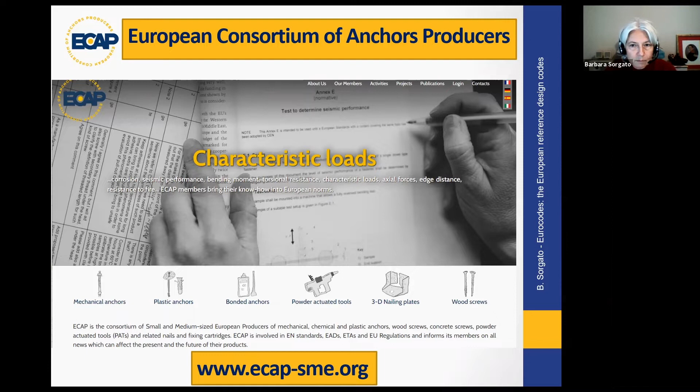ECAP is basically involved in everything around standardization, norms, European assessment documents, ETAs, and European regulations. And ECAP informs its members on all news which can affect the present and the future of their products. ECAP is independent and is self-financed through its members that are all small and middle-sized enterprises. We bring their know-how to CEN and EOTA working group tables. That means we are active in standardization.

And we also bring their know-how and inform them about the European regulatory framework on construction products, because that's needed when one deals with standardization of products. One needs to know the legal framework. ECAP is a community of manufacturers, namely ECAP belongs to its members and the members decide entirely about ECAP policies, and they work with team spirit.

That's important because they do not stick to national positions, because they know that Europe needs an open market and a shared market, so their approach is a European approach. All their efforts are in order to get European standardization and not national solutions.

Okay, the products. We deal with structural fixings. That's important because we will face Eurocodes from the point of view of these products, because that's the experience that we have. Structural fixings is a broad world, and we have bonded fasteners, bonded anchors, injection anchors. They have different names, but basically chemical anchors used in

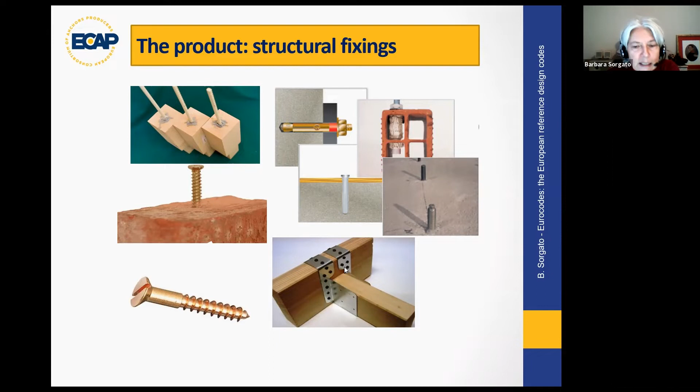concrete or in bricks. Then there are mechanical anchors, plastic anchors, and bonded anchors are also used in wood, also in timber. Then there are concrete screws also used in full bricks, and wood connectors, structural wood connectors, wood screws. They can be short as this one, but very long as well. And stuff like this that is called three-dimensional nailing plates. So these are the products we deal with.

Our products and generally construction products are covered by product technical specifications. I use the name technical specifications because it includes both standards, CEN standards, and EOTA assessment documents. The CEN standards, you probably know them with their national name. In Italy, they're UNI standards, in Germany, DIN, in France, AFNOR, then we have the Spanish UNE, and so on, for every member state. And they include also European assessment documents and related ETAs. So these are the product technical specifications.

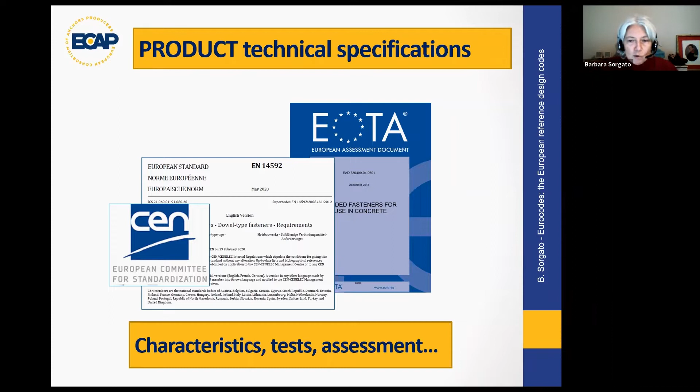These specifications deal with characteristics, tests, assessment of the product. So their approach is a product approach. And we are dealing with the CE marking, which is the framework given in the regulatory framework of the CPR, Construction Products Regulation. We will come later to more detail on the CPR. So we are talking about the CE marking, and the approach is the market, the European market.

But we are dealing with Eurocodes. Eurocodes is all about design. So it is not about the product, how to test it, how to assess it, which characteristics, but rather how to use it.

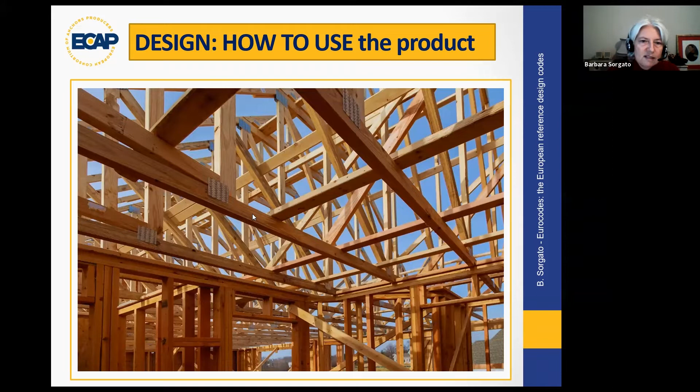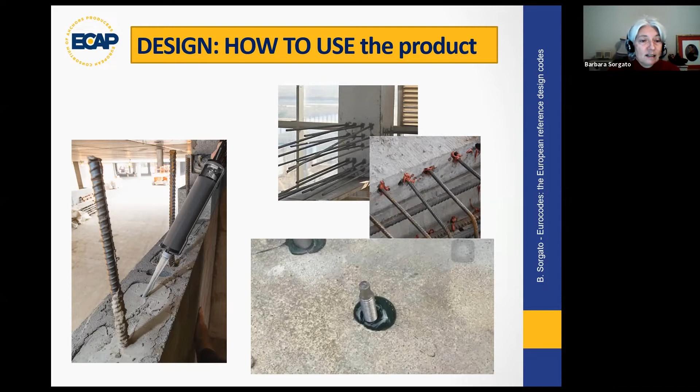There is a dedicated website of the European Commission about Eurocodes. The European Commission is advertising Eurocodes because Eurocodes are very important, because they are part of the common European approach. So if the products can circulate in the European market, also the design should be the same. So the website says the Eurocodes are a series of 10 European standards providing a common approach for the design of buildings and other civil engineering works and construction products.

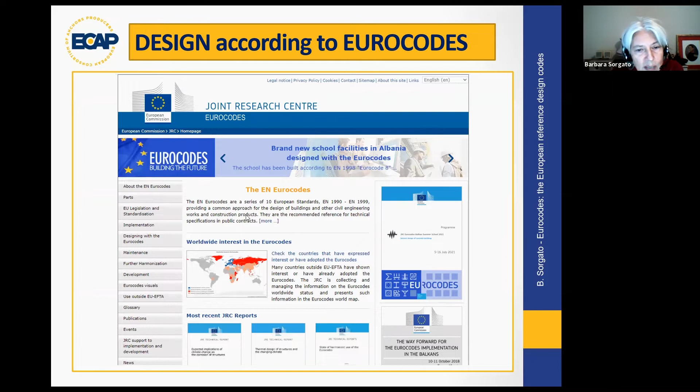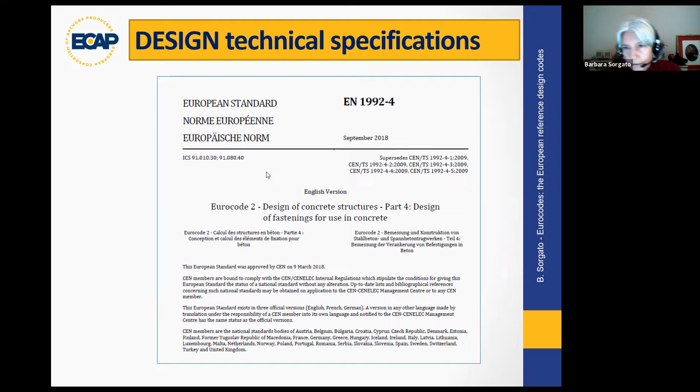This is the front page of Eurocode 2, part 4. It is a standard, it is a CEN standard that is then translated and published in the different CEN members, so DIN, UNI, and so on.

Eurocodes cover almost everything about the design of construction works. We have the Eurocode 1990, the basis of structural design. Then we have actions on structures, and then the different materials. Eurocode 2 is concrete structures, then steel structures, then composite steel and concrete structures. Then we have Eurocode 5, that's timber structures, and then masonry structures. Then again, a transversal topic, geotechnical design, and then earthquake resistance, and then aluminium structures.

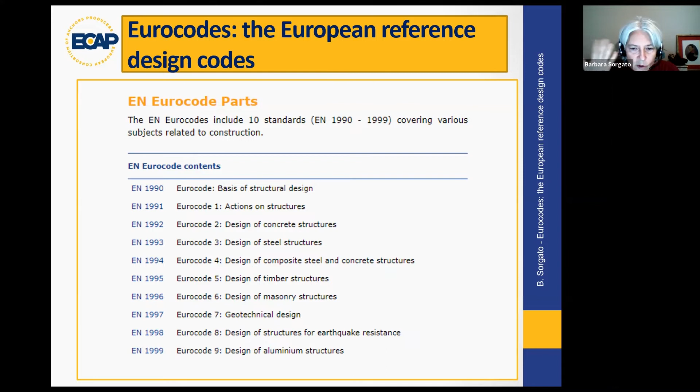The Eurocodes are due to come in their revision in a few years. The technical discussions are almost stopping now, but I guess as soon as the new Eurocodes will be there, we will start new discussions on other composite structures, because we have the Green Deal now and we cannot ignore anymore the climatic emergency we are in. So we need to change the way to design, and probably we will approach composite structures with steel, concrete, and timber. But that's the future, not the present.

This is, again, the structure of the Eurocodes. You see, we have 1990 and 1991, which are transversal topics: structural safety, serviceability, and durability. The actions on structures, which belong to all base materials. And then from 1992 to 1999, the materials: aluminium, concrete, timber, masonry, and so on. And then again, two transversal topics: geotechnical design and seismic design. This is the link between the Eurocodes. They are all linked to each other, and some topics are dealt with at the same time in one Eurocode and in the other one.

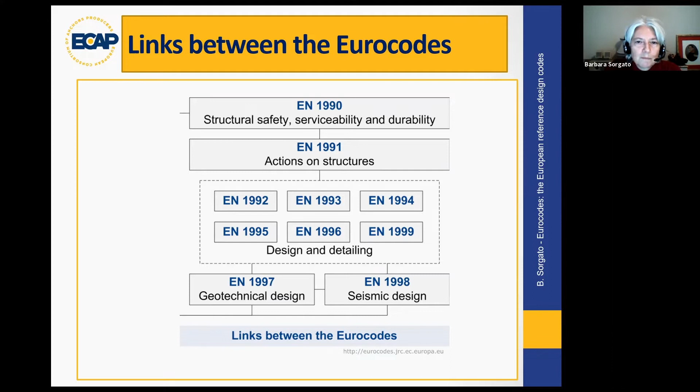Eurocodes also deal with execution. It must be execution, installation, because execution is part of the design of structures. Here are some examples with our products. Actually, a bad example: when an anchor is not put correctly in place and is not working correctly, an accident can occur. And this is a sadly well-known accident.

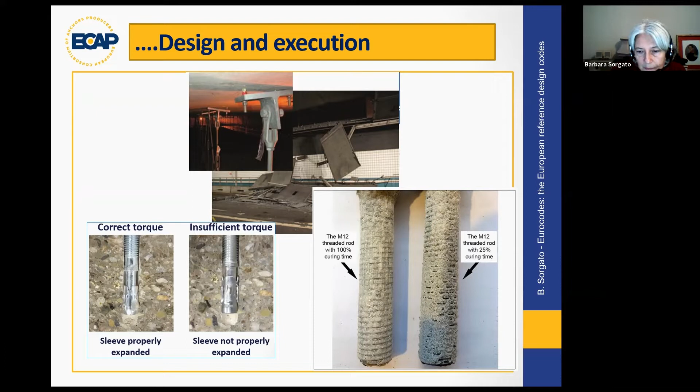You see here, for instance, in this mechanical anchor, it is about the torque moment. This is a correct one. This is an insufficient torque because the sleeve did not expand, so it is not correctly installed. And with a chemical anchor or a bonded anchor, injection anchor, however you want to call it, you see what happens if during the installation the curing time is not respected. So this is only 25% of the curing time. It simply loses adhesion.

Indeed, the Eurocodes have assumptions for design provisions. That means they describe how to design, assuming that the installation is made correctly. And there are a lot of assumptions on that. Let's have a look at these.

Post-installed fasteners. One assumption is that the concrete has been compacted adequately, so no water in concrete, concrete well done. And B, requirements for drilling operation and borehole. The holes are drilled perpendicular to the surface of the concrete, blah, blah. We are talking about concrete because that's Eurocode 2, design of concrete structures, okay?

The drilling is carried out according to the manufacturer's installation instructions. The hammer drill bits must comply with ISO or national standards. The diameter of the segments for diamond core drilling complies with the prescribed diameter. The holes are cleaned accordingly. So a lot of assumptions on installation and correct execution also belong to the Eurocodes.

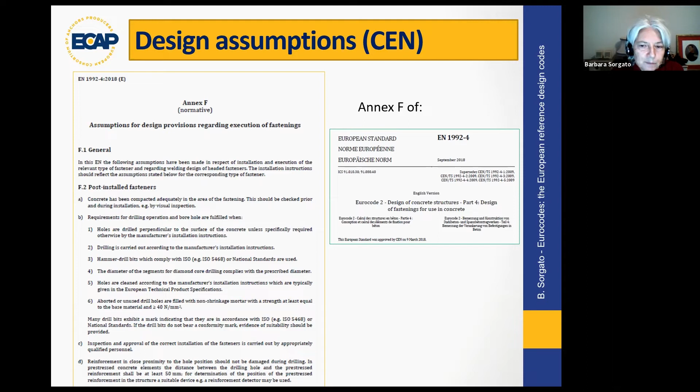Not all. There has been a lot of discussion on which Eurocode introduced execution, but now execution is dealt with by Eurocode 2 and also Eurocode 5, timber. It has a great chapter on execution. I'm talking about the revision of Eurocodes.

Where can I use Eurocodes? I say where can I use, because I think of myself when I was working as a designer in Germany long ago, and I learned design methods and job site practices that were completely different than the ones in Italy. Eurocodes were already there, but they were not put in place. They were unknown, they were too new.

So when I came back to Italy, there was no way to bring the same design approach. I'm not talking about the practices in job sites. That's different not only from member state to member state, that's regional, I would say. But the Eurocodes are a great help for designers that can move from one member state to the other and do their job using a common language, the Eurocodes.

This is where the Eurocodes are known and implemented differently. We see that the blue part is the adopted part. It's most of the European member states. Then they are adopted, or sorry, not only European member states. The light blue is also non-members, so non-EU EFTA countries. So we see Turkey, for instance, there.

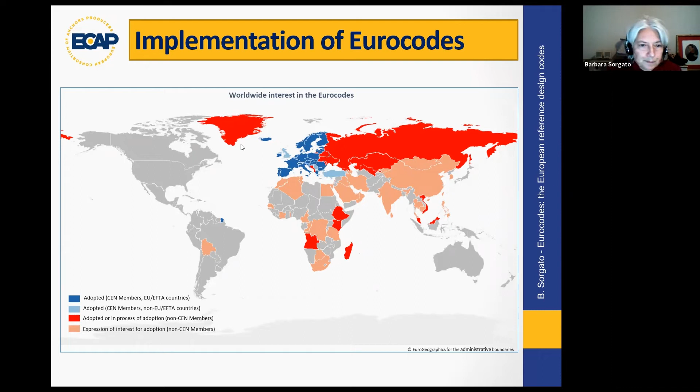That's a question that is always posed: are Eurocodes mandatory? To understand that, it's not an easy answer. We need to spend some slides on the legal framework. So we see on the website of the European Commission the regulations and directives that are related to the Eurocodes. And they are, of course, the Construction Products Regulation, the Public Procurement Directive, the Services Directive, and the Directive on the Provision of Information in the field of technical standards and regulations.

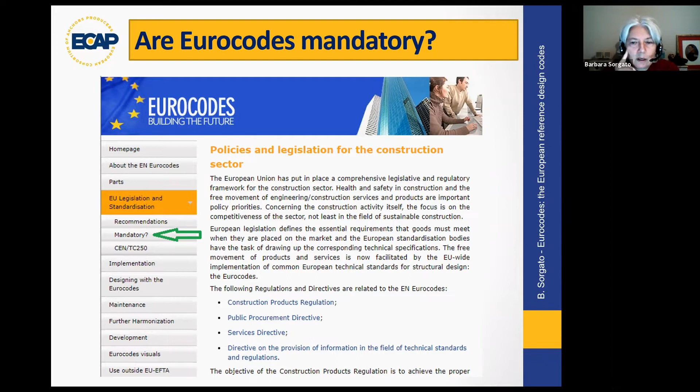If you look at the CPR, Construction Products Regulation, I put regulation in red to remind you that a regulation is a binding law. So it is transposed by all member states in the same way. It overrides national law. A European regulation is taken as it is and overrides national laws, whilst a directive can be interpreted from member state to member state because the sense is to reach a goal. But the regulation is a law and is taken one-to-one by all member states.

So the Construction Products Regulation deals with construction, not with design. Let's read what is written there, because it's important to see in which framework design is considered. The CPR lays down harmonized rules for the marketing of construction products in the European Union. The regulation provides a common technical language to assess the performance of construction products. And the common technical language is also the aim of the Eurocodes.

It ensures that reliable information is available to professionals, public authorities, and consumers, so they can compare the performance of products from different manufacturers in different countries. And here we are referring to the Declaration of Performance, of course. We are talking about public authorities, indeed. No, let's stay at product level first. What is mandatory in the Construction Products Regulation?

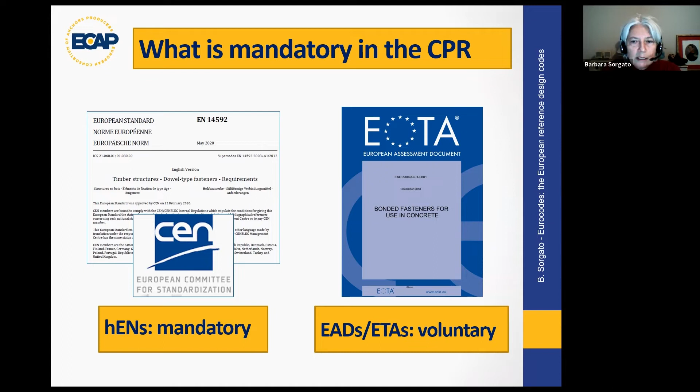Okay, so harmonized standards are mandatory, whilst European Assessment Documents are not mandatory; they are a voluntary path that allows manufacturers that have a product without a standard to have a CE marking through an EAD and then the ETA. That's what's mandatory in the CPR.

About Eurocodes, they are not mandatory, but the European Commission says a contracting authority may not reject a tender for works, products, or services which comply with a national standard transposing a European standard. And under the Public Procurement Directive, so here the European Commission mentions the Public Procurement Directive, not the CPR, it is mandatory that member states accept designs to the EN Eurocodes.

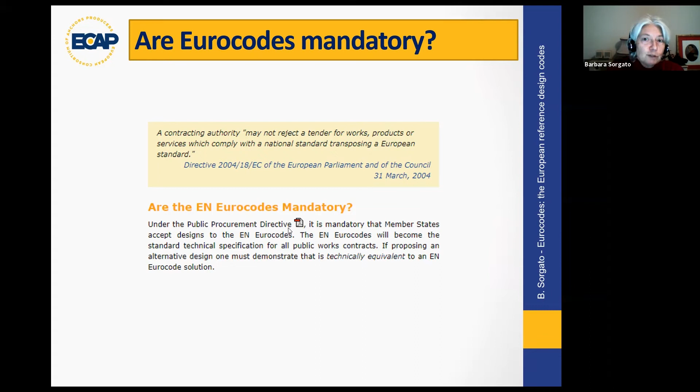The Eurocodes will become the standard technical specification for all public works contracts. If proposing an alternative design, one must demonstrate that it is technically equivalent to a Eurocode solution, which is very difficult. So that's why the European Commission is pushing for mandatory Eurocodes. And that's, of course, how it should be.

Again, recommendations related to the Eurocodes. We see here, the European Commission writes, recommendations and opinions of the European Union are not binding, but express the Council's or Commission's view on policy to the member states. So the recommendation says, adopt the Eurocode as a suitable tool for designing construction works, checking the mechanical resistance of components or checking the stability of structures.

Lay down the nationally determined parameters, NDP, usable in their territory. The European Commission is asking member states to lay down the NDPs. What's an NDP? Europe is different, of course. There are places with certain sorts of rocks. If you take the Netherlands, buildings are built on the sand. So there are different design approaches for certain topics. And that's why Eurocodes allow member states to give parameters that can deviate from the ones of the Eurocodes and reflect more the national reality.

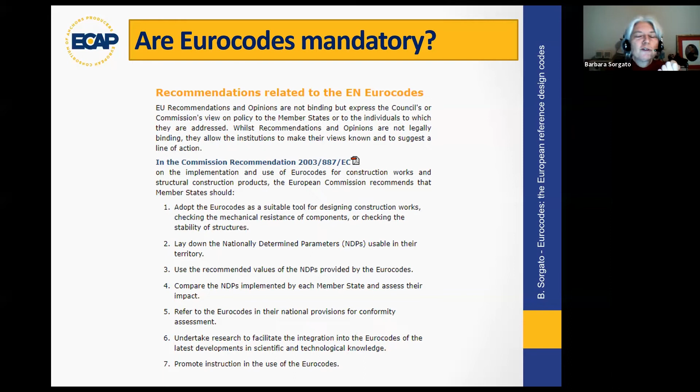Of course, the tendency in all these years of existence of Eurocodes and in the revisions is to limit the number of nationally determined parameters, but they are there and they allow a certain flexibility for member states. Okay, and the recommendation continues. So we see that the approach of the European Commission is not about mandatory, but it's about recommendations. And this is the last slide on the topic, the Eurocodes and technical specifications.

The Commission recommendation recalls that according to Council Directive, technical specifications should be based on the Eurocodes. Technical specifications, we have seen, are the standards and the European Assessment Documents, so the product technical specifications. In particular, the technical specifications necessary for the conformity assessment of structural construction products should refer to calculation methods developed in the Eurocodes. Before we go to calculation, why can't we say Eurocodes are mandatory?

I think the explanation is that we are talking about safety here, and according to the Lisbon Treaty, safety belongs to the member states. And that's why the member states are the ones that are ultimately responsible for that, and why the approach remains up to the member states. So the European Commission can only recommend.

Having said that, a lot of member states already took the Eurocodes as their national design codes. For instance, Germany: their national design code is the Eurocode.

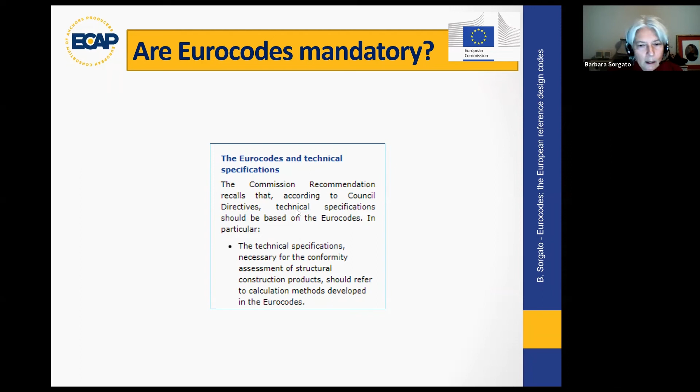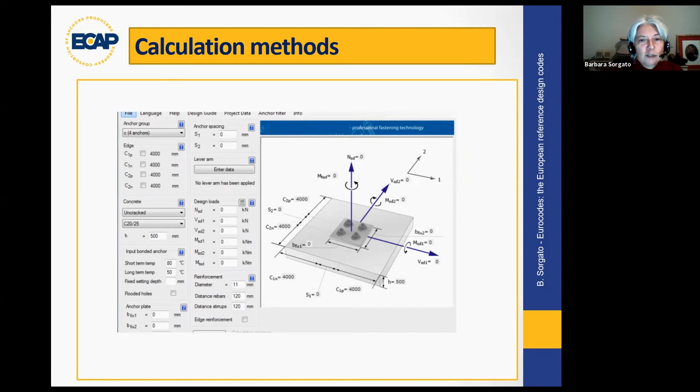About calculation. In our field, for instance, calculation of anchors or fasteners means a lot of calculation and knowing how to install: if the concrete is cracked or not cracked, how much the fasteners can be loaded, so the design loads, and the distance between the single fasteners, so the spacing and the, I can't find the other word, edge distance. Okay, so according to which data are these calculation programs done? According to the Eurocodes. For instance, in this case, we are mentioning Eurocode 2, design of concrete structures.

But there is another aspect of the design. There are other design technical specifications, for instance, EOTA technical reports. EOTA technical reports are developed as supporting reference documents to other EOTA publications, especially EADs, European Assessment Documents. They are often developed alongside these EADs to cover aspects that go beyond the pure product assessment or beyond a single EAD. As such, EOTA technical reports detail relevant aspects such as design, execution, or on-site testing.

Of course, because an EAD is on a new product, and it could be that a new product needs a new design. That's why we must also consider technical reports. And we see, I took a screenshot from the EOTA website. These are the latest technical reports. You see that most of them are logically about design of products.

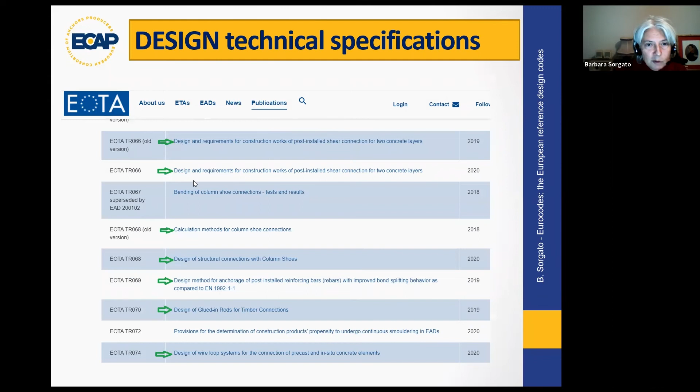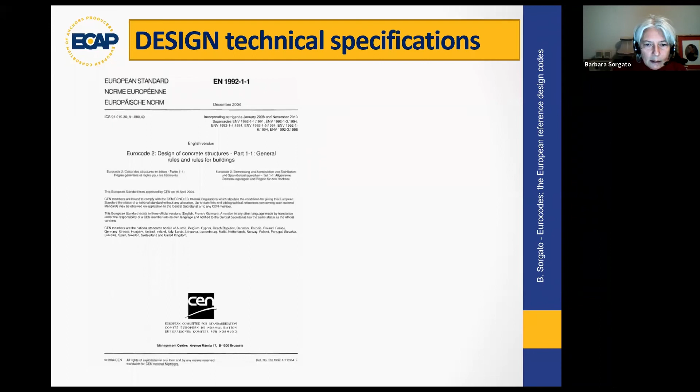And in this case, when we look at Eurocode 2, I will follow Eurocode 2, but I also need to consider in my calculation, if the product is covered by an EAD, the design method for anchorage of post-installed reinforcing bars, rebars, with improved bond splitting behavior as compared to Eurocode 2, part 1. So there is the Eurocode and the EOTA technical report.

For timber connections, we have, for instance, the spacing for screws according to Eurocode 5, EN 1995. But we also have the spacings for screws according to EAD 130118-01-0603. They have fantastic numbers, the EADs.

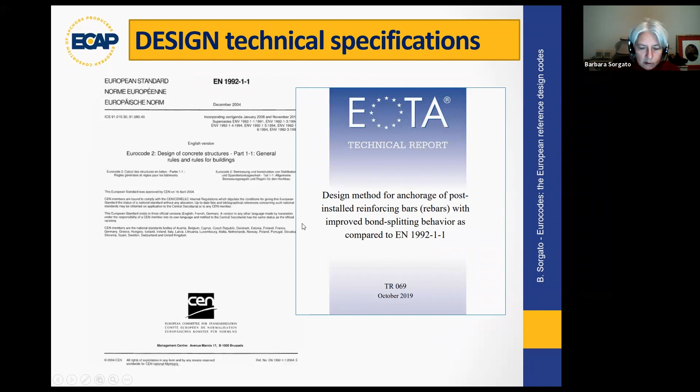So one must know Eurocode 2; compared with this one, it's said in the title, there are differences, that's fine. And there are not differences, let's say inconsistencies. I would use the word inconsistencies. Sometimes there are inconsistencies or additions. In this case, I would say it is an addition, but it happens there are inconsistencies, yes. The problem is the different working methodology of CEN and EOTA.

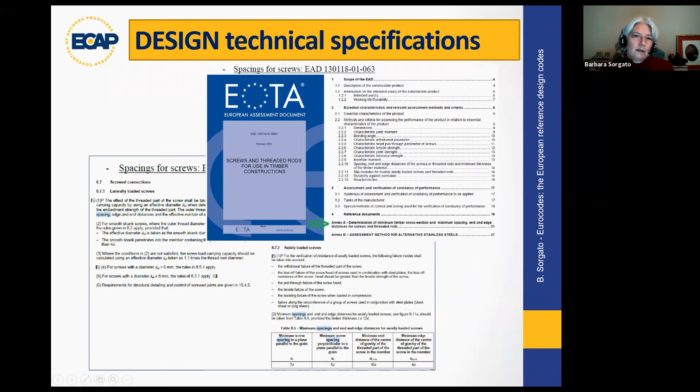The Eurocodes are written as standards. So there are people around the table, there are documents circulating, there is a working group working on that, there is the vote of the technical committee, so documents are circulating. In EOTA, documents are not circulating, because the approach is confidentiality, because the EADs are done for one manufacturer. It is one manufacturer that goes to one TAB to get a European assessment document and probably a related technical report with design for its own product.

So there is no circulation of opinion, no technical discussion in a big group, and that's how EOTA works. And it is how it is. And it's European, but in fact it is one manufacturer and one TAB. So it happens that there is no dialogue between Eurocodes and technical reports because they are two different institutions, and there is no place where these institutions can dialogue, or if there is a place, the dialogue is not done properly. So yes, there are inconsistencies.

But I hope that with the CPR revision, because this situation has a lot to do with the CPR, this topic will be tackled and solved. Yes.